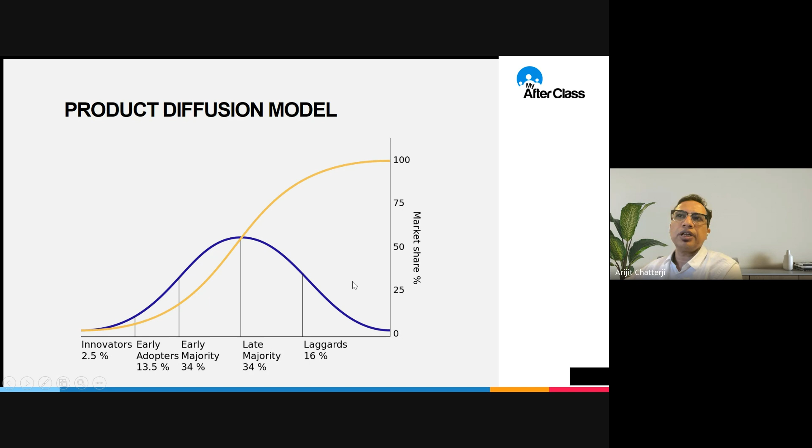Then it is showing that more and more the laggards who never even used the mobile app have also started using it. That means if these people have started using it, the market share is nearly 100%. We are talking about the reach of the market share.

And as this is the maturity cycle - your sales and the product maturity - as the sales is growing, it will come to a maturity stage. Remember the S curve we were talking about in the beginning? This is that S curve, where it has matured and then it will come to a point where a new technology is going to take over, and the new S curve - this product will go towards obsolescence.

So the suggestion is that we have to keep innovating. With this, I have come to the end of this session. I know I had to skip a lot of other slides, which may not have been of much interest as well since this is an introductory session. But I am here to take any questions or suggestions you want to discuss.

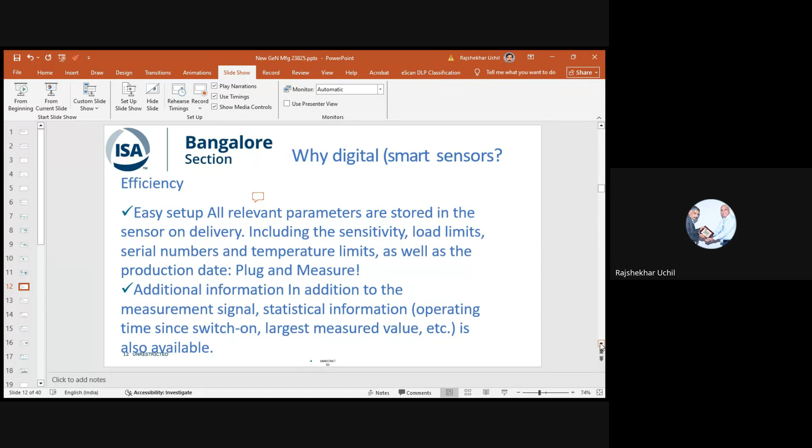When was it last operated? What was the largest measured value? When was it last calibrated? All this information can be read in the control room itself. Also, if the sensor is going bad—for example, if it was calibrated for 150 degrees, but the temperature is going higher, 160, 170—you get an alarm at the control room itself saying please note that the sensor is being exposed to high temperatures. Please do something on cooling it.

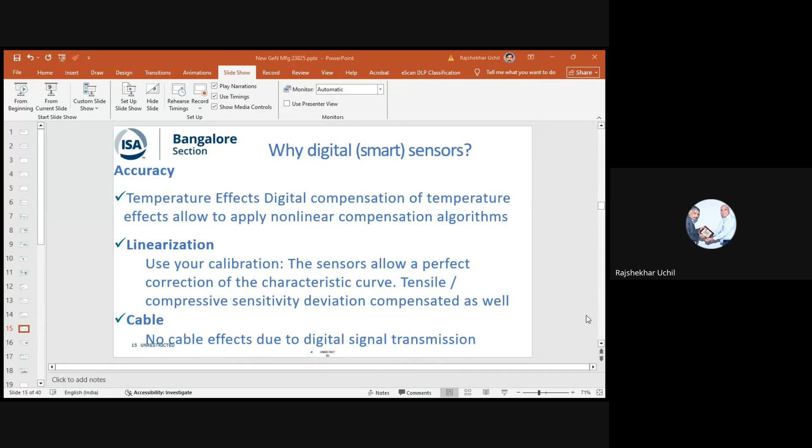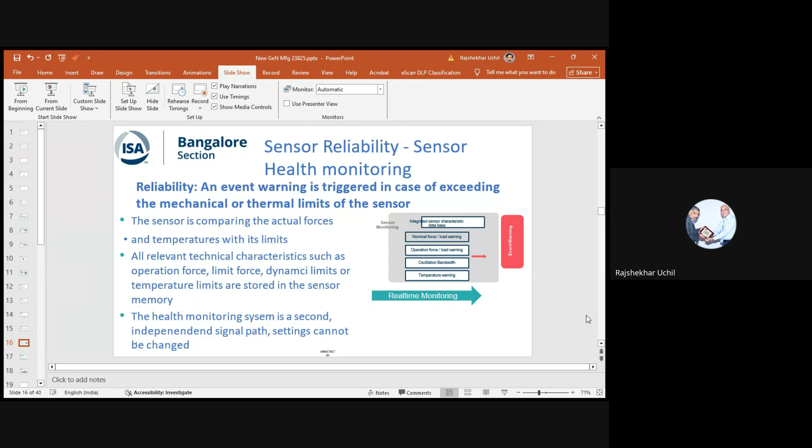So these are some of the advantages. You also have an event warning in case of any problems on the sensor. The sensor is comparing the actual forces and temperatures. All sensor characteristics are built into the sensor. So the heartbeat of the sensor goes to your control room and tells you what is happening, and no one can change this—it's built into the sensor. You could get alarms at the field or in the control room on the problems of the sensor.

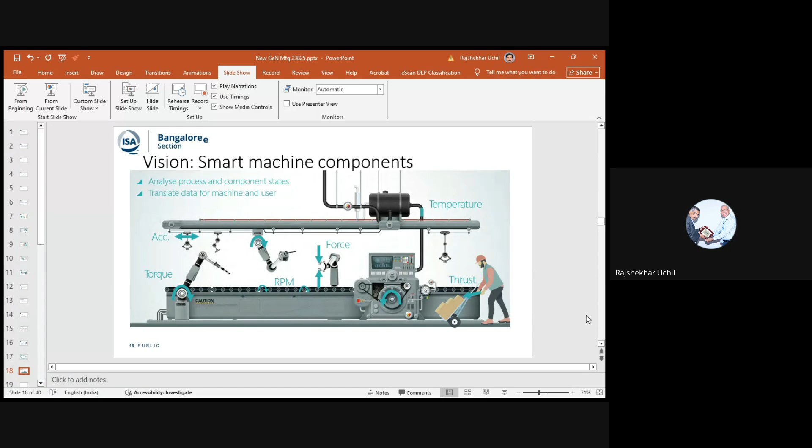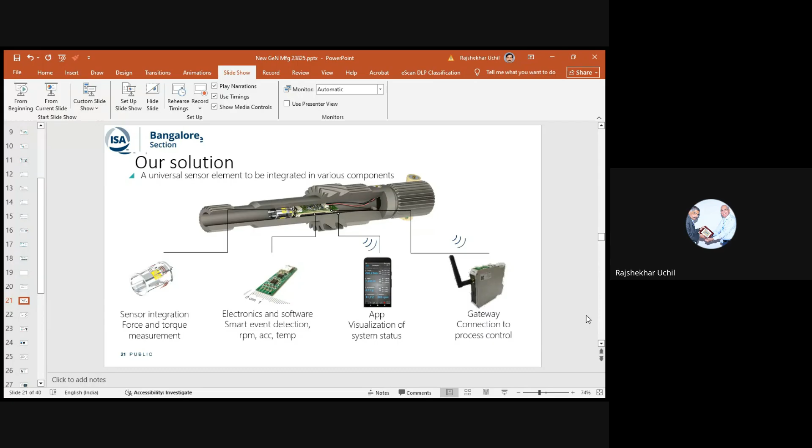So you integrated the sensor for force and torque measurement. Electronics went inside the body. You have an app which gives you all the details on a mobile. You have a gateway to the process control. This is how a smart sensor is designed for field applications.

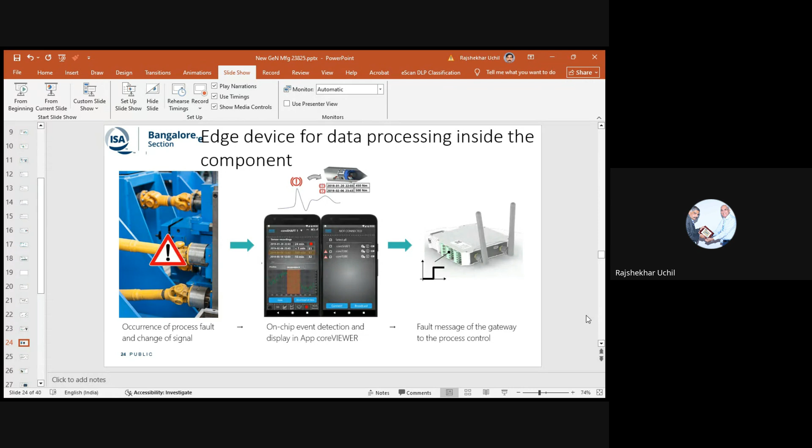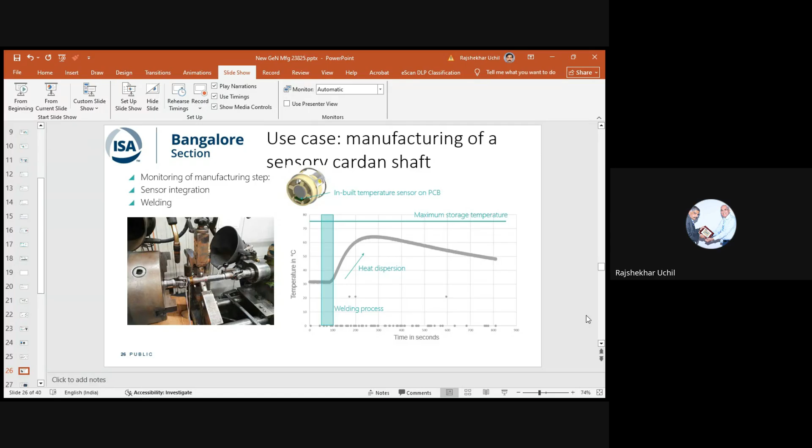Then again on roll forming, creation of a profile - what is it that you measure? Force and torque. You can't retrofit it. It's a very harsh environment, so cabling is not there, it has to be wireless. These are lots of the challenges faced when you design smart sensors in the field.

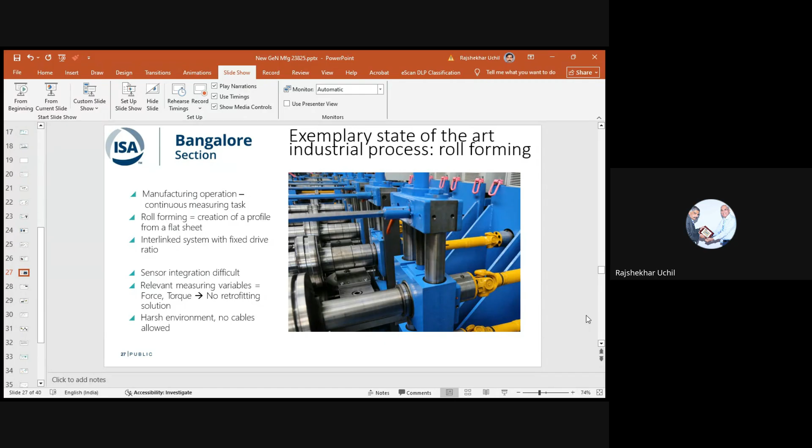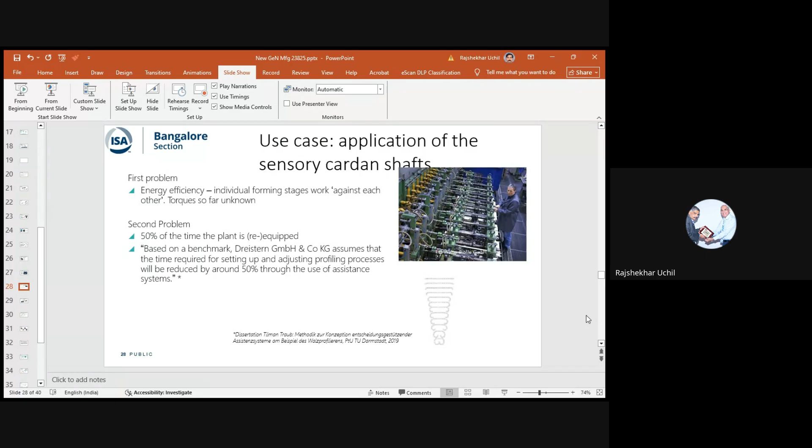This is what, as a designer, you have to understand - what are the constraints, and what are the problems. Energy efficiency, we don't know the torque, then what is the time for setting - all this goes into the sensory design. These are all examples that were practically made based on all these designs and applications. You designed the sensor so that your objectives of process monitoring, detection, and energy optimization are met.

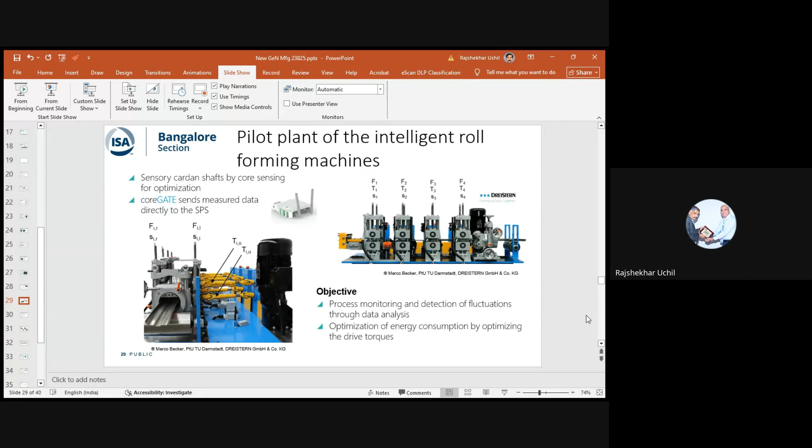Now we are looking at the torque calculation straight away. Just an example - where are the places these are used? Your overload protection in tractors, your lifetime assessment, your wear protection on valves, predictive maintenance, on your fitness, on your gym, on your process. These are anything that you can think of today - you could put a sensor there and it measures your information.

So what are the challenges? The demand on process monitoring and optimization. What are the solutions? You integrate the sensors in the machine. You have miniature electronics today. You use MEMS sensors, a small IC which does the communication. You also have a mobile application so you get data in the field. You cannot always stand near these machines, so you could stand away and your mobile reads all the data. Retrofitting is easy, and data analysis and interpretation becomes very easy. These are some examples of smart sensors.

Now we go on to a little on the communication. The IO link is just one of the many communication protocols being used. Many of you would have come across Modbus, Profibus, Foundation Field Bus, HART. So IO link is one of the other standardized technology protocols. It meets the IEC standard 61131-9. So you have devices, masters, IO device.

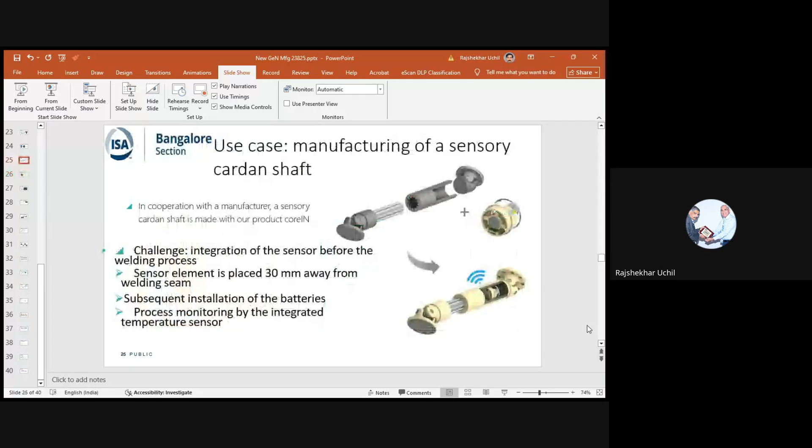So this goes back to what I said about smart sensors, that's an embedded system. You have all that inside the sensor itself. As I showed in the first slide, all your sensors, all your information is now inside the smart sensor. This is your embedded sensor. So your peak detection, your filters, your traceability, your algorithms, everything is inside the smart sensor, and you're getting only a digital data output. So your controller is taking only, say, an IO link in this case. The challenge is, how do you put all this in the field? Reading the data then becomes simpler, but the design of the sensor becomes that much more complicated.

Hello. Yes, hello, I think there is some background noise. May I request people to mute their mics, please?

There is one question from the participant, Dr. Vishal Wadkar. Are there specific case studies where smart sensors significantly reduced energy consumption? I have not looked at energy per se on this, because the energy is also related to your process parameters. For example, now we use variable frequency drives for fans and pumps. You know that fans and pumps follow the Cube law, so if you decrease the speed of the fan or pump by, say, 20%, your energy consumption comes down by 50%. If you have a sensor which continuously monitors the speed, your variable frequency drive can also give you your energy output continuously. It's possible.

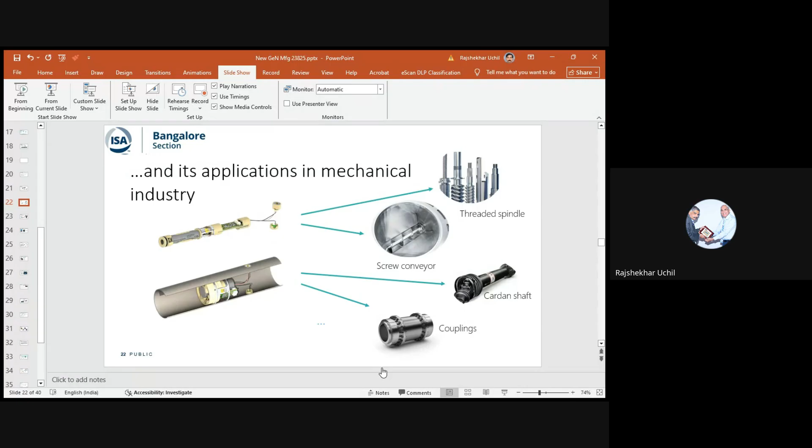You take an example of your computer. So for example, if the fan is not working in the computer, you get an alarm on the computer immediately saying fan not working, computer will shut down. Or board getting overheated, computer gets shut down. So what's that? That is all monitoring the health of your hard disk and your motherboard in a very limited way, but immediate information.

So anything, all these electronics today do a continuous troubleshooting, telling the user what's happening. Your temperature is getting heated, your fan is not going, there is a problem in your drive. Sometimes some of these softwares will tell you whether your hard disk writing is going on or not, if your batteries are working or not working.

So for example, the Lenovo system that I have, it tells me immediately that the internal battery is not working, only the external battery is working. So tomorrow when I tell my computer or my IT man, I will say, look, please arrange an internal battery also, because the diagnosis says that the internal battery is dead and cannot be charged.